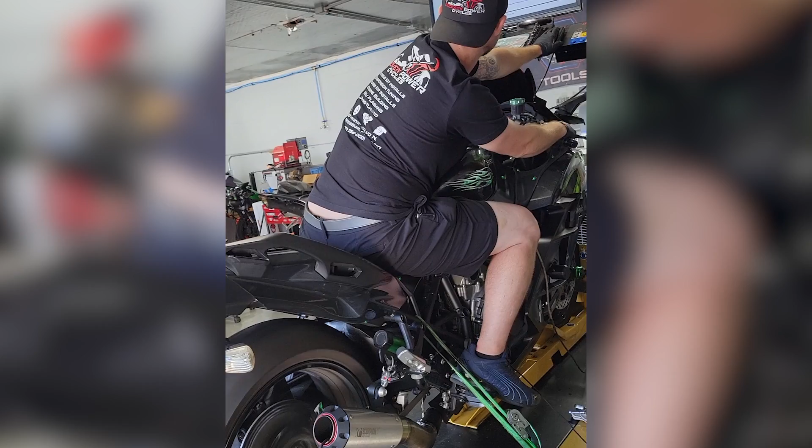All right, guys, so we've been working on this 2018 H2 SX here. We talked to the customer a little bit, explained everything, the process as to how to fix the issue he's having. Overall, the mail-in flash that he received is actually a pretty damn good mail-in flash. But what he was experiencing was little hiccups in the power band, and I'll show you why.

This is kind of a common thing with the mail-in ECU flashes. The customer was complaining about a low end to mid-range, specifically from around 4K to 7K range, where the bike would kind of hesitate a little bit at light throttle. Not all the time, but typically when I hear that it has a mail-in flash, or a full exhaust with a high flow air filter, things like that, whenever I hear these keywords, those are the things that usually make me think it's probably gonna be something to do with either you got an exhaust installed and you didn't get it tuned, or who knows.

Maybe the tune isn't accurate. Maybe it wasn't a good mail-in flash and the map didn't work for your bike, right? Which happens actually kind of often. So anyway, got it on the dyno, and exactly what he was feeling is what we're seeing on the dyno.

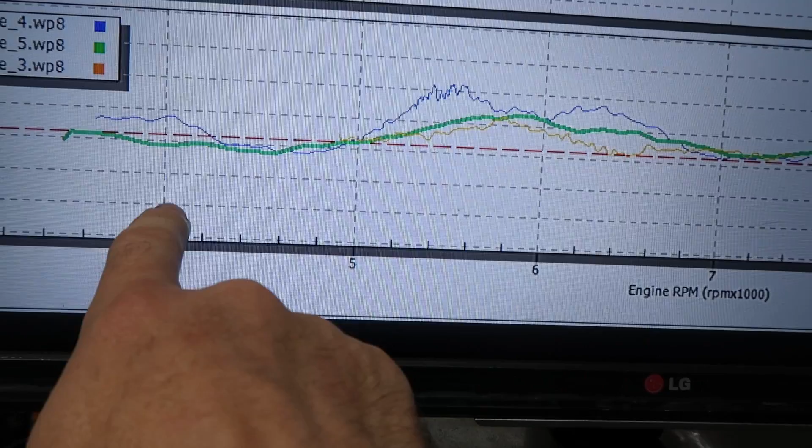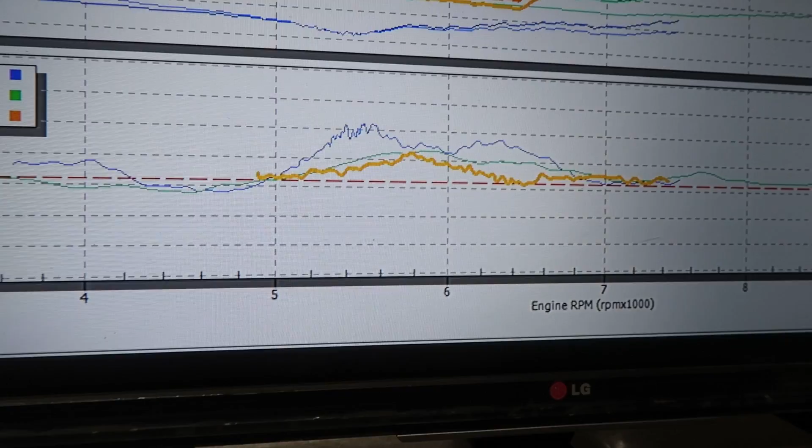He said specifically in between roughly 4K on the bike, which really it's closer to about the 5K range, 5K to 7K, he said it had some hesitations to it. Look at our AFRs right around that time period. So these are partial throttle pulls, like 10%, 20% range style pulls, or actually anywhere from about 5%, about 10%, and then this one was about 15% up here, and then we had a 20% one, but the 20% one was actually fairly close, and I'll show that here in a second.

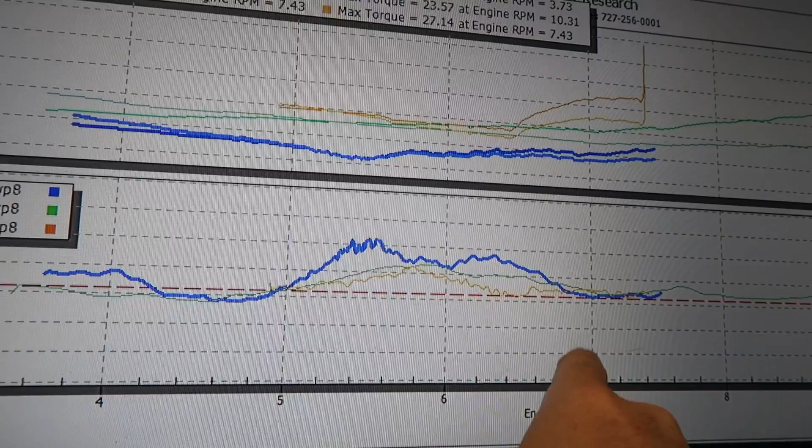But look at the light throttle stuff from 5 to 7K roughly. Look how lean we go in all of our partial throttle settings. We're dealing with 14 to 15, 15.2 AFRs. We're extremely lean, 14.2, 13.7-ish. We're very, very lean considering that this is a forced induction bike.

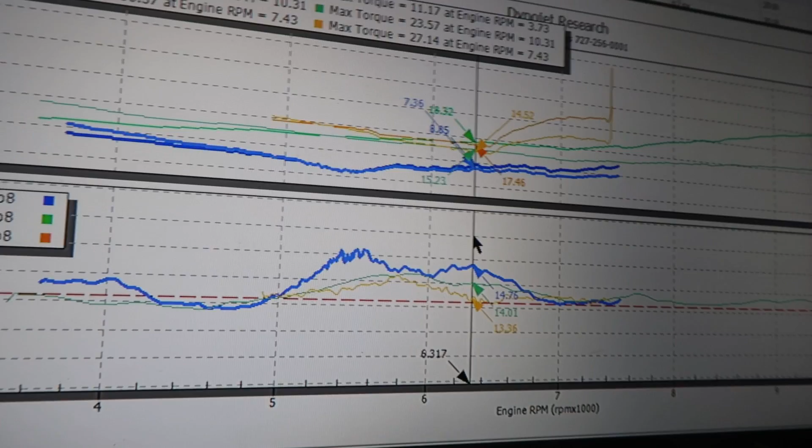Whenever you have forced induction going on and you're trying to build boost, as you're building boost, you're adding more air to the system. So when it's running lean and you have excess air running through the motor, the issues that you normally feel on an NA motor versus this are a little bit more exasperated, a little bit more noticeable, because it's trying to go under boost. It needs the fuel even more so than a regular naturally aspirated bike.

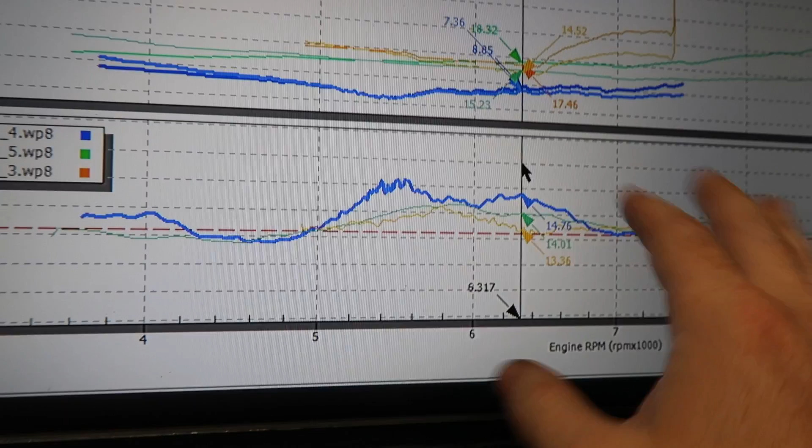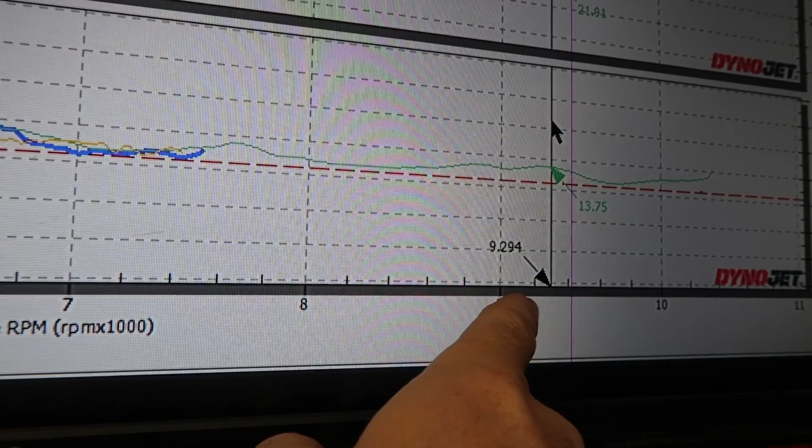So it needs a lot more fuel than what it's seeing. I explained this to the customer and let them know. Even at like 10 to 15% throttle, we're seeing 13.7 all the way up to 9,300 RPM and on up, and 13.6 at around 10,000 RPM.

This isn't a guy that's beating on the bike, he's primarily cruising, and I'm assuming does anywhere from about 10 to about 50-60% throttle. He's not racing this bike, it's a touring bike, so he's just trying to go out there and enjoy it and wants a very smooth partial throttle map.

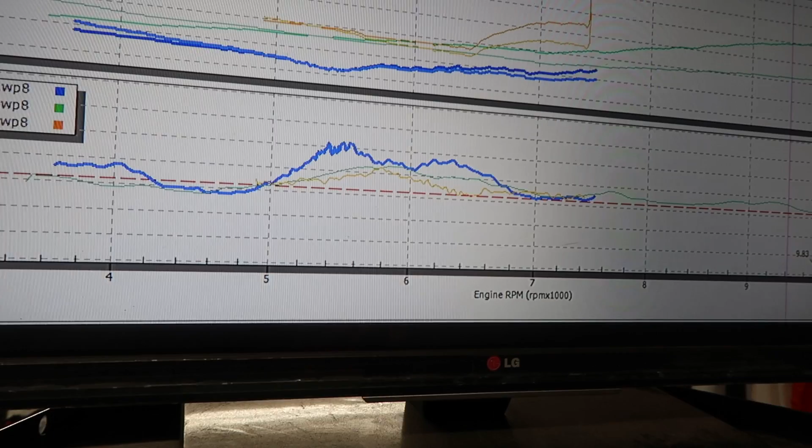I explained all of this to him, and he opted to go ahead and just get it dyno tuned. I did give him the option to go back and deal with the company he was originally dealing with and send them this chart to tell them what needs fixed. But yeah, you've got to dig your ECU out of this bike, and it's a pain in the ass.

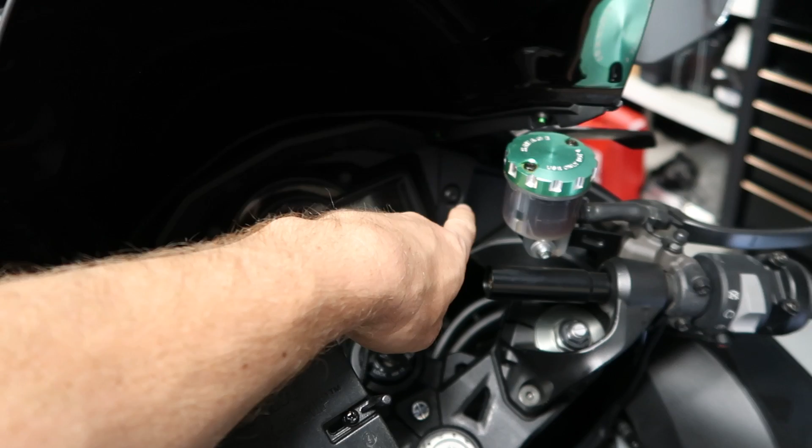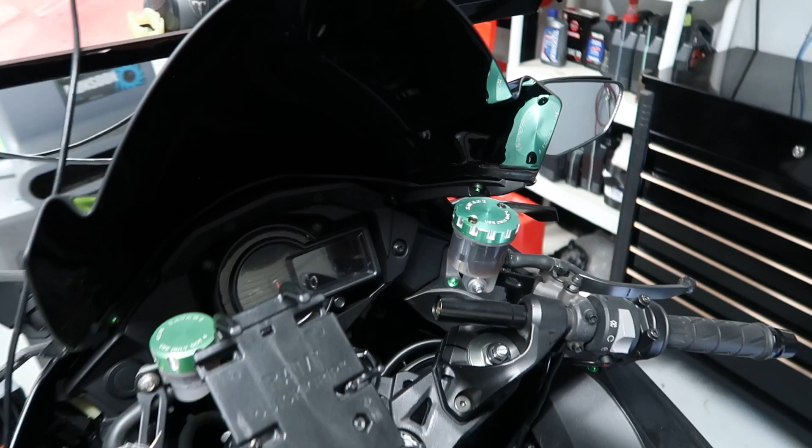For those of you who don't know where the ECU is on these bikes, it's up over here behind this fairing, but it's not as easy as it sounds. What you have to do is basically remove pretty much the whole front end. You can try to cheat the system by taking the bolts out of the cage, but to do it the right way, the front end and side fairings need to come off.

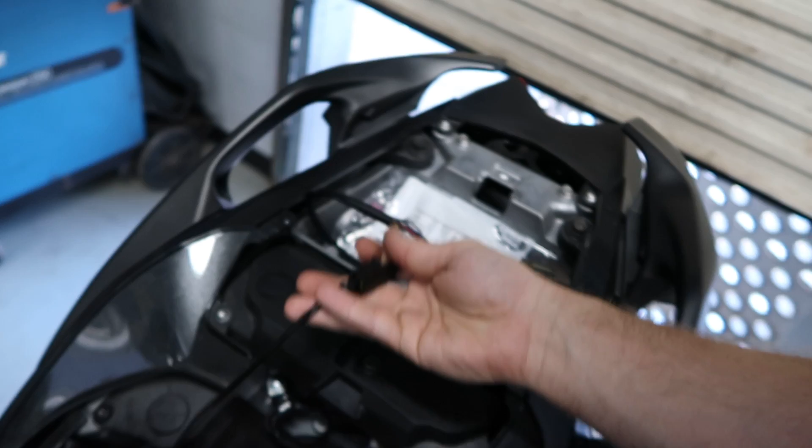It's a pain in the ass, it's time consuming. Then you have to route a new harness so we could tap into the ECU, running the wire from the front of the bike all the way to the tail section back here. Here's the wire we ran all the way up to the front of the bike, underneath all the fairings, and then we tap into the KDS plug as well.

This is how we flash the ECU. We're on a Molex connector that goes to the interface. Now what I'm in the middle of is getting ready to—I've already put a new flash in it—we're gonna start rerunning the bike and start dialing it in.

We did get a full throttle pull. It does have a restrictor in it, a silencer in the exhaust that we just removed. That's another factor to keep in mind, because he dynoed a little low. He did have this silencer in there, and it's a very, very small opening right here, about 1.5 inches roughly. Very tight opening—we took that out.

So we're gonna retune it without any silencers in it, and that should help bring more power to the bike, which made about 200 horsepower or so with that silencer in it. You really don't need too much more than that on a bike like this, but we're gonna see what it makes anyways, regardless. Then we're gonna clean up the chain and sprocket for them, wipe the bike down, and do our normal touch on the bikes.

But anyway guys, let's get this thing fired up. I got it warmed up again, and I wanted to catch this video. Even though I should be leaving right now—it's about 6:30 or so—I'm staying late to film this for you guys. So here we go, let's see what it does real quick.

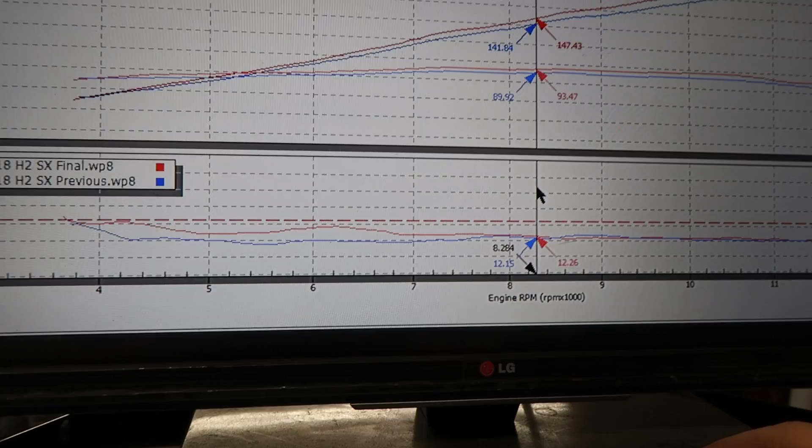We can monitor when boost is really coming in, so we can play with the AFRs and the ignition timing a little bit more. With that being said, we were able to run a little bit leaner of an AFR down in the lower RPMs while we're building boost. So it gives them a little bit better drivability, a little bit smoother of a drivability, and we'll look at all those here in a second as well.

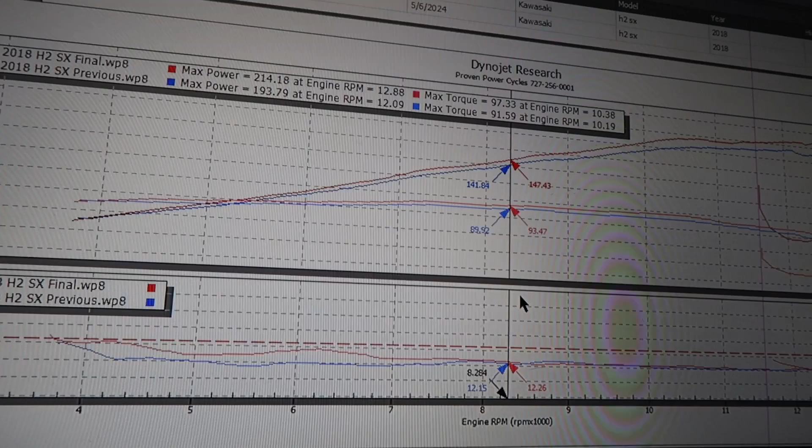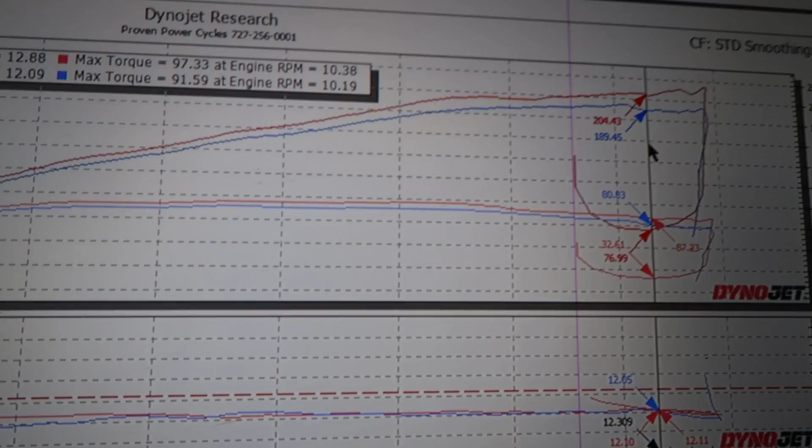If you notice here, AFR is very similar to the mail-in flash, which, like we said, is a good flash. The only other difference was with that silencer out, clearly we were able to pick up power across the power band. We picked up about 20 wheel horsepower, but we were also able to throw a little bit more ignition timing at it with that silencer being out.

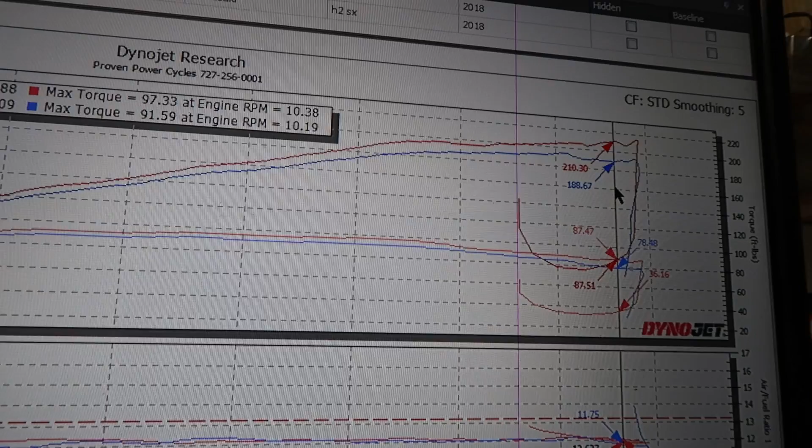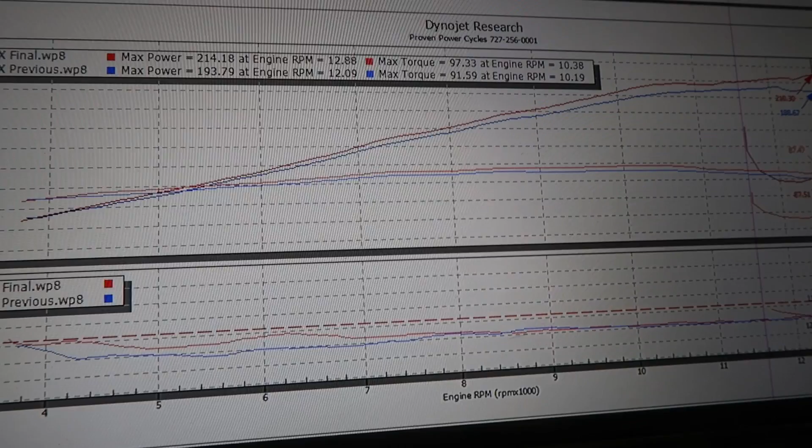Now we could push this bike even harder, we really can. It ended at 214 wheel horsepower with 97 foot-pounds of torque. But we're not going to, just because the guy's not out here trying to race it or anything like that. But we can - you see this little dip down here?

We have a slight dip here, and it has some little dips here and there all the way up to red line. That's indicating that we have the ability to add a little bit more ignition timing, but this customer does not have an intercooler. It's basically a stock bike. The exhaust is a little bit on the restrictive side considering how much power this thing makes.

So again, I don't want to add it. I don't want to stress that motor out even more so, given that we don't really have all the proper parts to really push this bike to make that power consistently, where I would feel confident that, hey, you can go out here, ride on the highway and just do pull after pull, and this thing's gonna be, for the most part, okay.

You still need to give it some cool downs, still need to use common sense, but all in all, just want to let you guys know there is a little bit more room in there. We could probably get this thing up into the 220s, 230s if you had the right setup and with us pushing it a little harder. But with that being said, I'm still very happy with that.

Here's the other graphs I actually wanted to show you guys to kind of show you the difference. It's a little difficult, but this is to show you the difference between those partial throttle pulls where you're steady on the throttle versus kind of how it was when he first came in here.

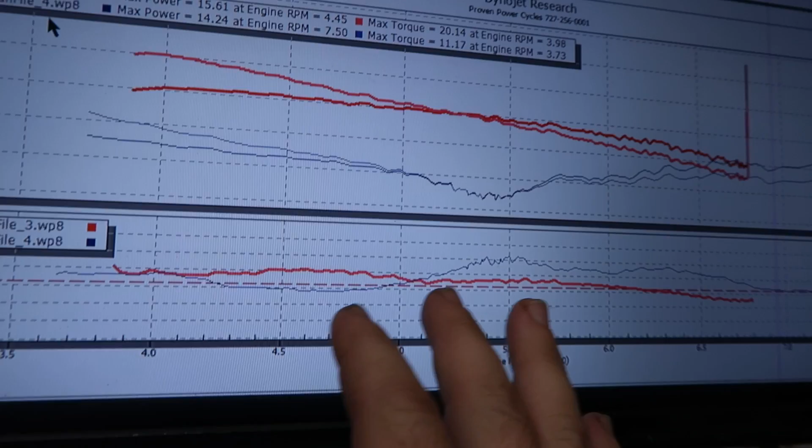So this is a somewhat decent comparison, okay? Now notice the red line is the newer tune. If you look here, we're literally the difference of one horsepower.

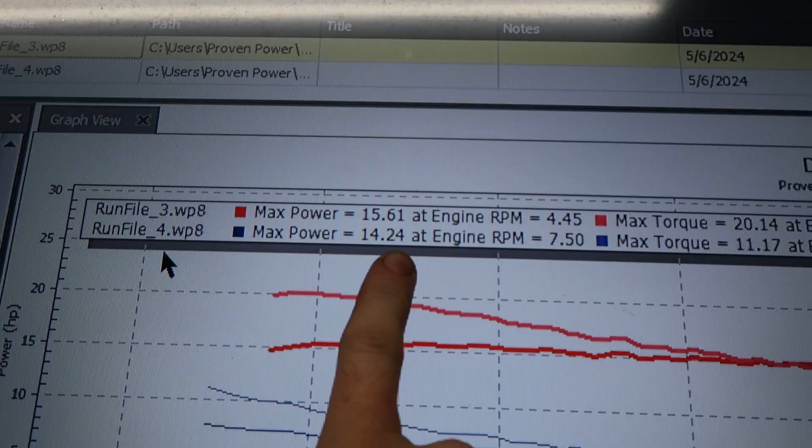Well, major difference, because of the spike here. There's a major difference in torque because of that spike. It's reading that spike, which is just kind of like a glitch.

But notice before, this is roughly, if I had to take a wild guess, maybe 5% throttle or so. We're talking about very minimal values here. This is more like a cruising speed. So notice here, our torque and horsepower are on a downward curve, similar to here.

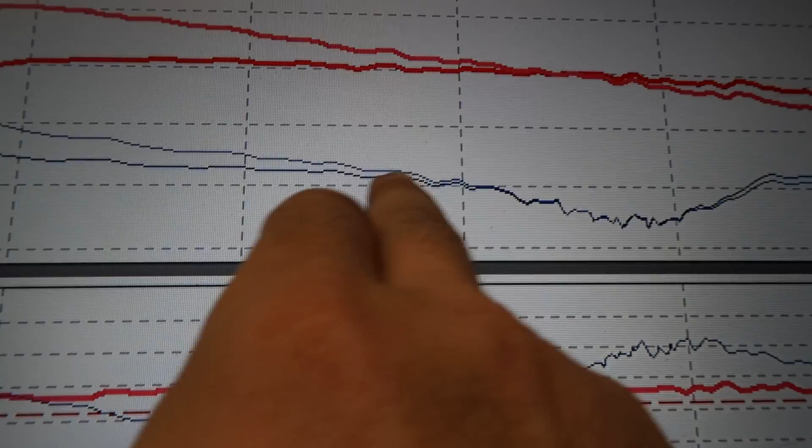But now look at this portion here. See how it just kind of falls on its face, and then it picks back up here, right around the 5,500 RPM.

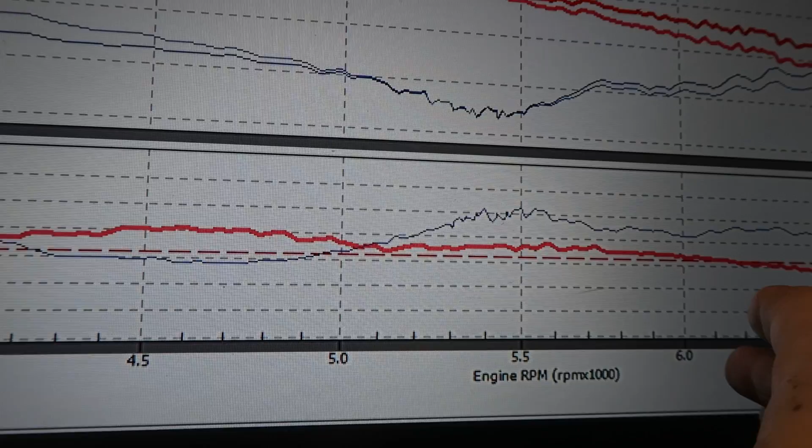This was his major complaint, remember, anywhere from 5,000 to 7,000 RPM, right? So this was one part of the throttle mapping we hit where it fell on its face and then picked itself back up, which is gonna make for a crazy ride.

This is gonna be like you're losing power and torque, so the bike's kind of falling on its face and then picking back up again. So it falls on its face, then picks back up in speed. This is all within about 700 RPM, so it's a very abrupt hit and then pull.

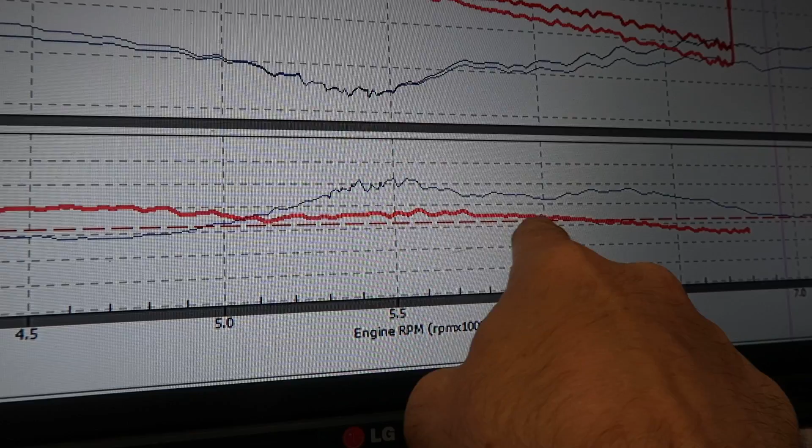Notice our AFRs, see how they get very, very lean, and they stay very, very lean throughout that whole pull up until about 7K.

And now look what happens at 7,000. Notice the power band and everything picks back up and it starts to pull. That's part of the supercharger kicking in, but it's also because the AFR got into a good little range.

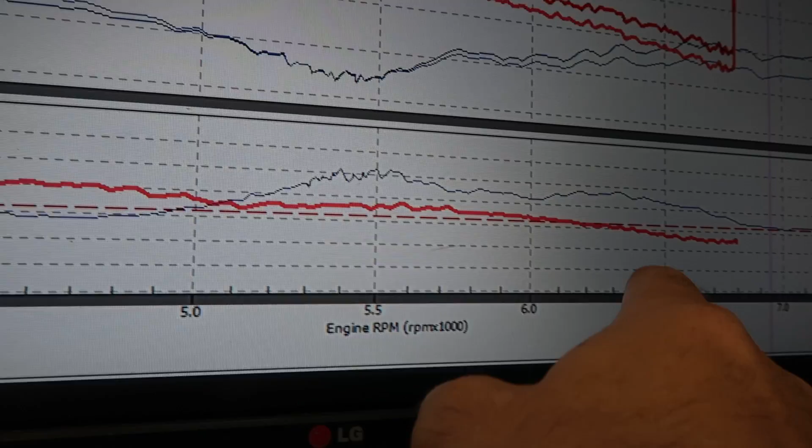Notice how here we have a nice steady reading right around 14.0 AFR, and then we enrich it a bit more, and as we're coming into boost, you notice how the AFR dips off. That's going to make for that steady, smooth look.

This is the torque curve here. Notice how smooth and how flat, more or less, that torque curve is.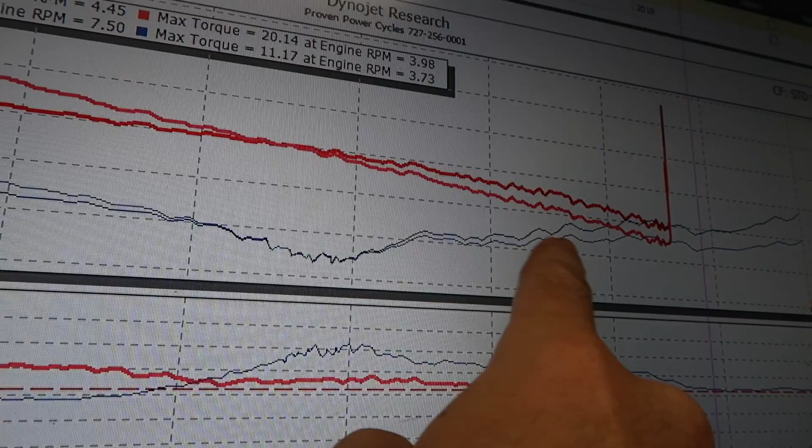Now as you pull up in the RPM, it's gonna kind of fall off, and if I had held this curve to 7K, it would have started to pull back up, kind of like this curve. It would have started to pull back up because the supercharger and the boost would have kicked in.

So I mainly wanted to show you the drivability, the difference in drivability, and how this interpolates to a smoother pull versus this power loss and then re-engagement.

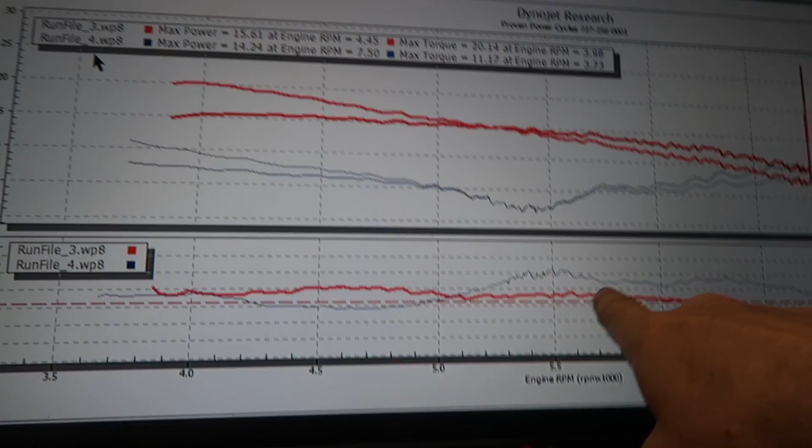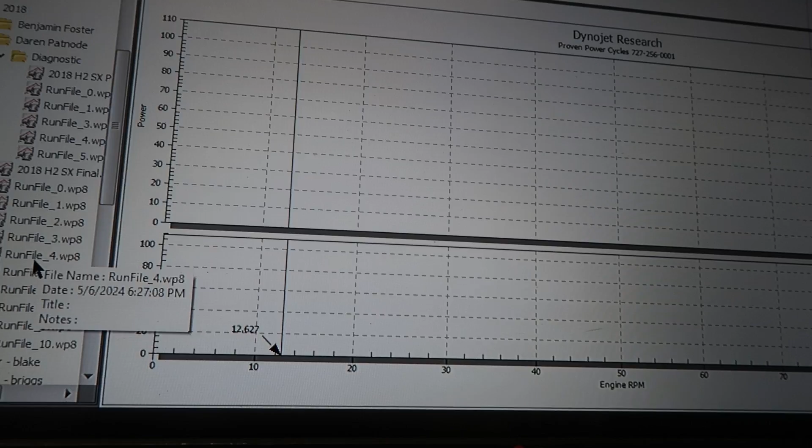It's a little hard to describe stuff like that, honestly. It's hard to show because it's really difficult to hit the exact same throttle percentage every single time. So that's more or less how you see the partial throttle mapping, at least what he was complaining about in particular.

Again, we did tell him he's more than welcome to mail it off, and it's a pain in the butt getting to the ECUs and everything. So he was like, nah, screw that, just redo it. So we did. Hopefully he loves it.

So with all that being said, guys, I think it came out great. We appreciate your support. Thank you so much.